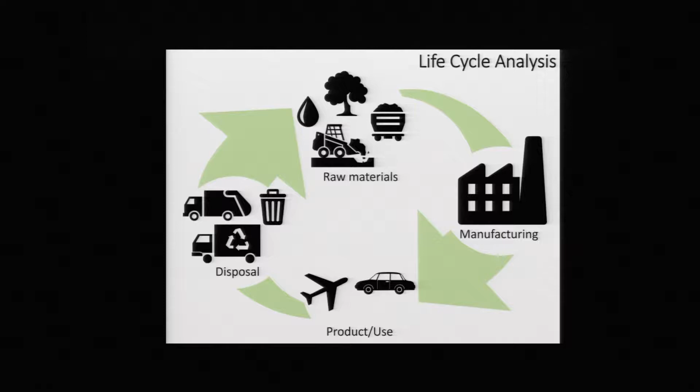To do this, we need to consider every step of the life cycle of a product we're designing. That's from where are we getting the materials, to how are we making it, how are we producing it, and eventually how will we dispose of it. In every single one of these steps, you need to think, how am I affecting the environment, and how can I ultimately reduce that environmental impact?

But I want to focus here today on one example that pertains mainly to manufacturing and the products that we're making. You'll notice the two examples I've used to represent the product come from the transportation industry. That's because the transportation industry and the manufacturing industry have one key thing in common: they're wasting 20% of the world's energy.

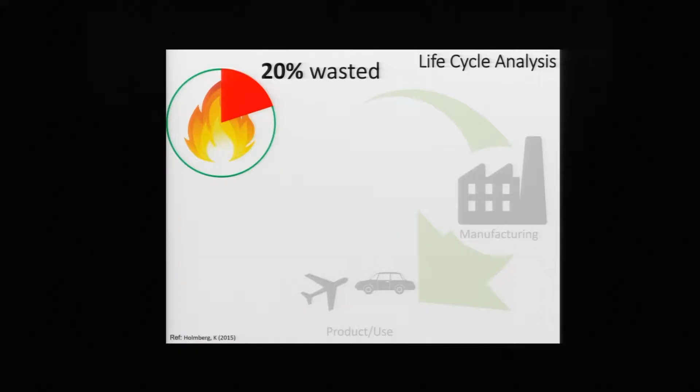Can you guess how? To overcoming friction. That's right, we are losing 20% of the world's energy to friction. This has huge environmental and economic consequences.

Think about the cost of the energy. Think about the energy we're producing is coming mainly from fossil fuels, and therefore how much toxic gases we're emitting without even using that energy properly. And finally, with more friction typically comes more wear, and more wear means more waste.

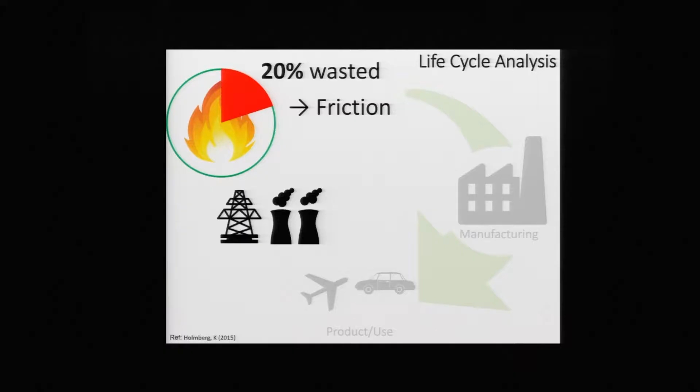So how do we overcome these issues? Well, it turns out there's an entire field of study focused on some issues that revolve around friction and other types of issues similar to this, and this field of study is surface engineering.

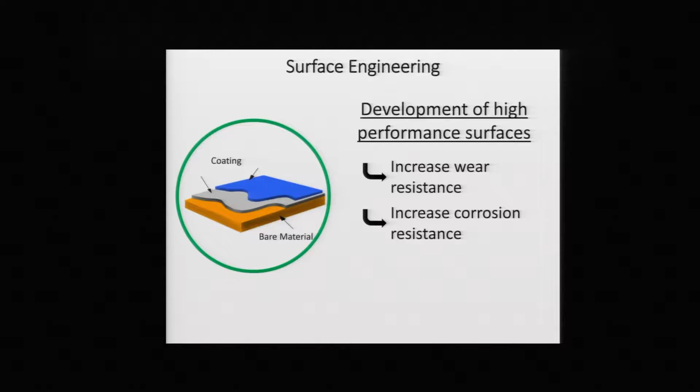Surface engineering focuses mainly on the development of high-performance surfaces, and this can be to overcome any type of environment. But the type of things that we tend to look at are how to increase wear resistance, increase corrosion resistance, and also reduce friction. But to do this, we need to look at both what materials we'll be using and what processes will we make these new coatings with.

So when we choose the materials, the first thing we need to think is, what materials do I have available to me? The three major classes that tend to come up are metals, ceramics, and polymers. Now, these materials, unfortunately, on their own, don't necessarily offer the type of properties that we need, and that's because each of them have their own advantages and disadvantages.

For example, a metal might be very ductile, but in consequence is not very hard. Or a ceramic is very hard, but then is not very ductile, and that's why it results in fracture typically. So it turns out that if you combine these materials to form a composite, you can actually take advantage of each material and tailor a new material that will give you the properties you need.

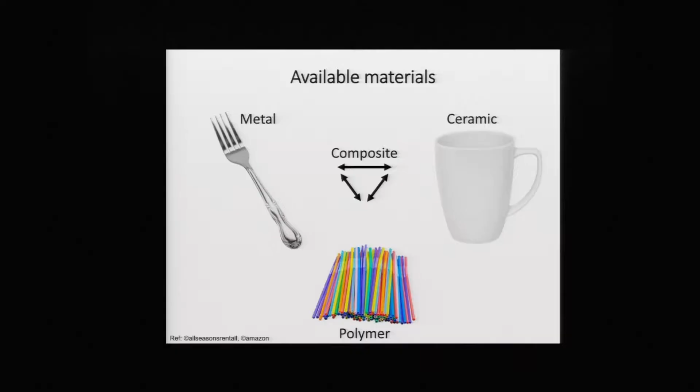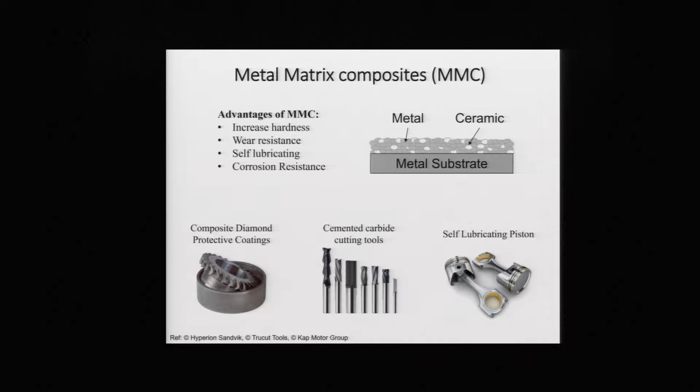In my work, I focus on metal-ceramic composites, and we often refer to these as metal matrix composites. These offer us increased hardness, increased wear resistance, increased corrosion resistance, and even self-lubricating properties. That goes back to that friction issue. If we could make self-lubricating properties, we can reduce friction and even try to reduce the need for toxic lubricants in various industries.

So how do we make these metal matrix composites? The technique I'm proposing here today is the cold spray process.

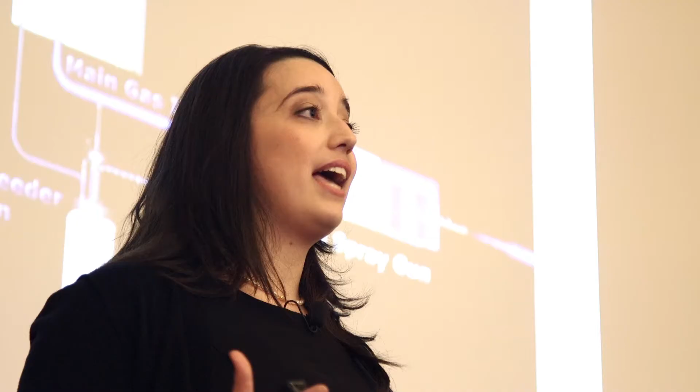The cold spray process is actually quite a simple technique and has only 3 major components. The first is the high-pressure gas. The second, the powder feeder. And the third is the cold spray gun, or we also refer to this as the cold spray nozzle.

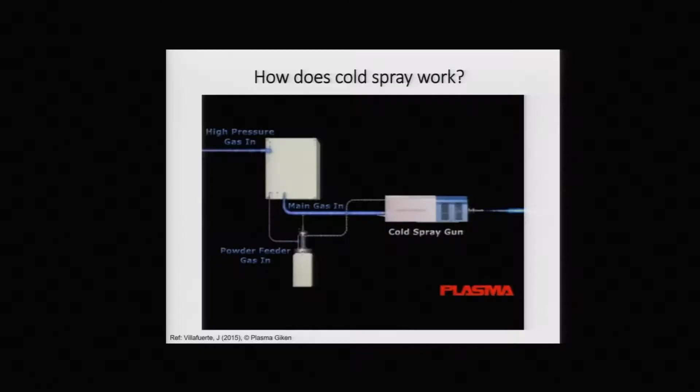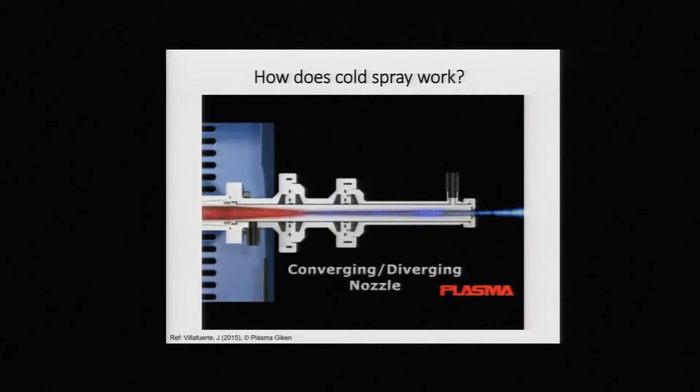The gas going directly to the powder feeder allows the powder to be injected into that gas stream. Once it reaches the nozzle, it recombines with the heated gas and can then go through the nozzle and achieve supersonic velocities. The particles coming out of this nozzle then impact the part and create a coating.

But why cold spray? Why not any other technique? Well, it turns out the cold spray process is quite environmentally friendly. The gas we're using is nitrogen, which is found in the air that surrounds us and is therefore non-toxic to us.

The powder that we're using is not melted. These are deposited in their solid state. And by not melting these metals, we are not getting any byproducts.

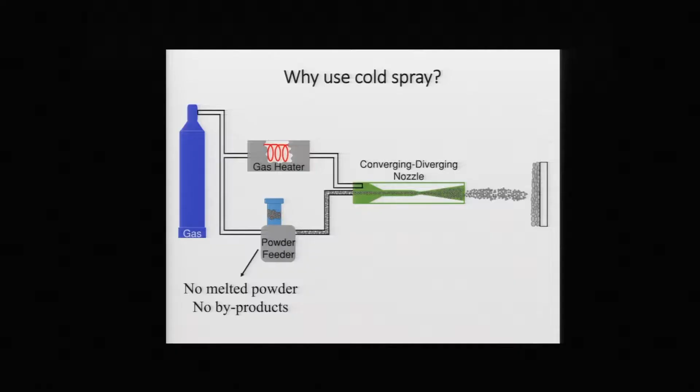Another interesting thing is that the heat input, the energy we're putting into the process, is actually not significant since we're not melting that powder. There's also various research being done to optimize the nozzles to try and increase velocity simply through the nozzle characteristics, rather than increasing velocity through an increase in temperature. So if we do this, we might eventually even remove the need for that heat input.

Another thing is that this is an additive process, so we are getting nearly 100% of the powder we're trying to deposit in the coating. But in order to do that, you need to understand how these coatings are being formed, the deposition mechanism, how they're bonding, and all kinds of characteristics like this. And that's where work like mine comes in.

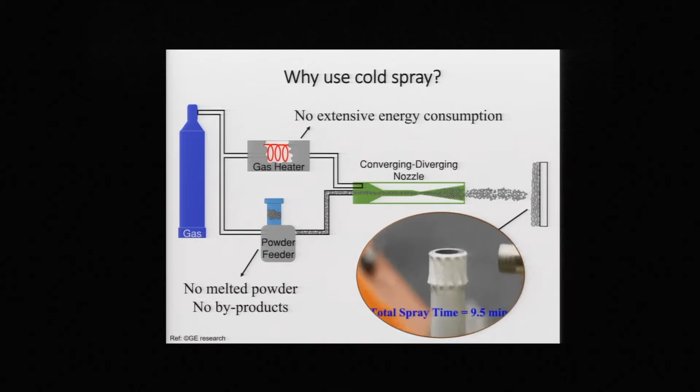Just a little side note, this coating technology is not limited to thin coatings. We can actually grow features onto a part because we can make thick coatings. And we can use this even for repairs.

But how do these particles get deposited? I mentioned, in order to get that 100% deposition, you need to understand the bonding mechanism. In metal-metal interfaces, the bonding mechanism is mainly through what we call plastic deformation, which is basically a permanent deformation of a material. It's really that impact that induces the plastic deformation and results in bonding.

And in metals, plasticity is really well understood. Take, for example, a fork. If you try and bend the fork, it'll maintain its shape, and it's the fact that it maintains that shape that is called plastic deformation. But if you think of a cup, can you do that? Especially in an impact scenario, what you would mainly expect to happen is this.

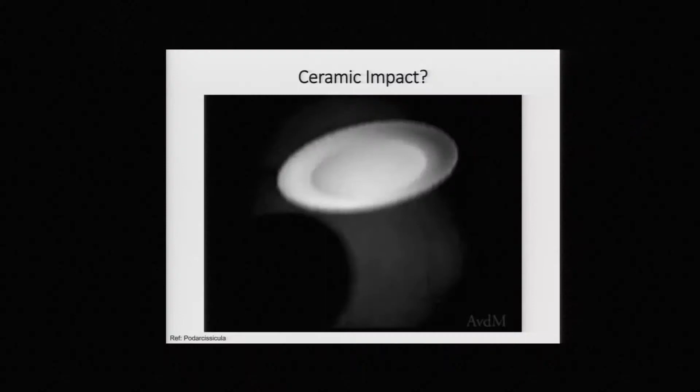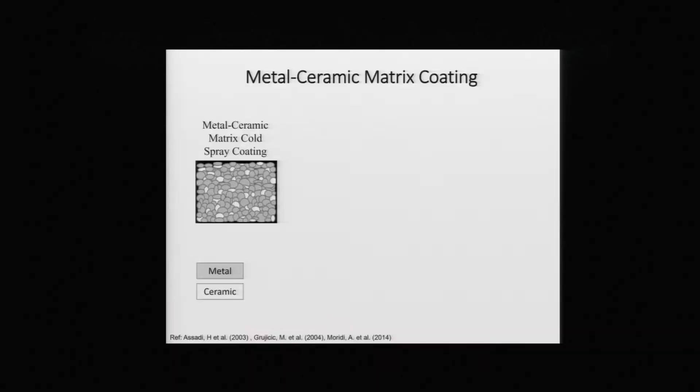But luckily, we can create metal matrix composites by cold spray. So let's see what's happening there. When we spray these coatings, we have both metal and ceramic powder being sprayed simultaneously. And when we spray these, we have 4 different types of interfaces. A metal impacting a metal, which bonds, as we explained, through that plastic deformation.

A ceramic impacting a ceramic, which unfortunately does lead to fracture. And finally, we have the metal-ceramic interfaces. These metal-ceramic interfaces are unfortunately not well understood, and that's what my research focuses on.

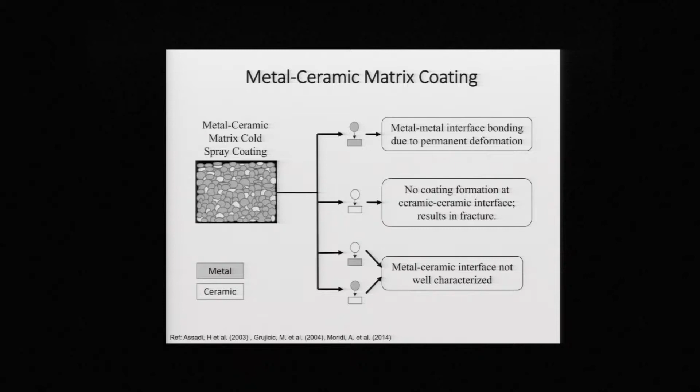When I'm trying to look at these metal-ceramic interfaces, there are 2 things that I'm focusing on at the moment. The first one is, what velocity do I need in order to achieve deposition? Just to give you an analogy here, these particles technically need to bond through plastic deformation. And as I mentioned, the ceramic won't plastically deform. So in that metal-ceramic interface, what do I need to get a bond, and why is it bonding?

You could think back to when you were a kid playing with Play-Doh, and you threw it at a wall. In some cases, it bounced back at you. But if you threw it hard enough, it could actually stick there. Well, that's exactly what we're trying to see here.

What is hard enough to get bonding? We study this by changing the ceramic and seeing how the type of ceramic that we're using will influence the critical velocity for deposition.

But once these particles have been deposited, we need to know how well are they bonding. How good is that adhesion strength? Once again, we study this by looking at how the type of ceramic will affect it, and also how surface roughness could affect it.

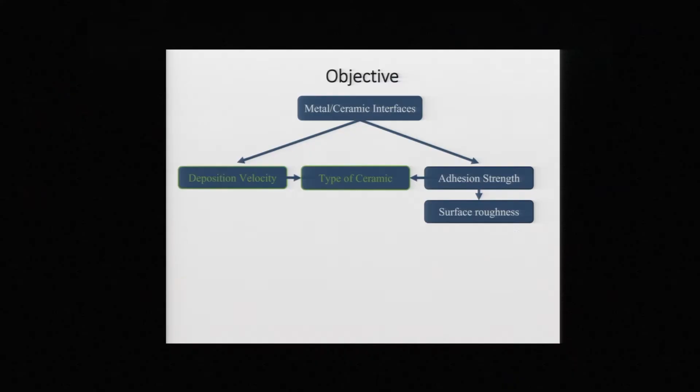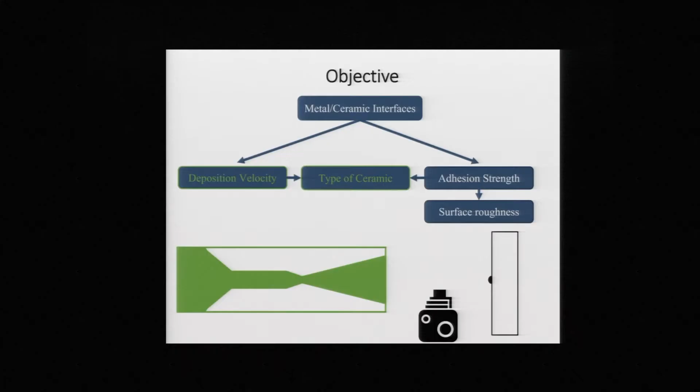So let's start with the deposition velocity and looking at how it's affected by the type of ceramics. To do this, I did experiments at MIT. These experiments were basically to spray those particles towards the two ceramics and capture the impact with a high-speed camera. The ceramics that we used for this were aluminum oxide and silicon carbide.

Once this metallic particle passed in front of the high-speed camera, you could see when it will bond and when it won't. In a case that it didn't bond, this is what the images would look like. Effectively, you can see that the particle is impacting at a relatively high velocity and then rebounds, and the rebound velocity is actually lower than the impact velocity.

If you take a ratio between the rebound velocity and the impact velocity, you get what we call a coefficient of restitution. This is basically a measure of how much energy is lost during that impact - a quantification of the amount of energy you're losing due to plastic deformation.

If you were to take this particular experiment and plot it on a graph with respect to the impact velocity, you would get this. And if you repeat this multiple times, you would get a series of points that show you how that coefficient of restitution varies with impact velocity.

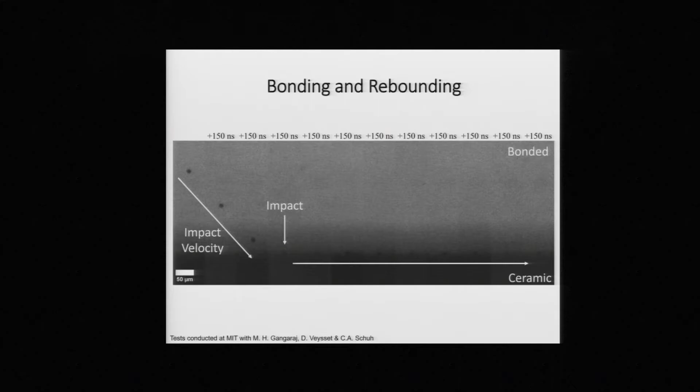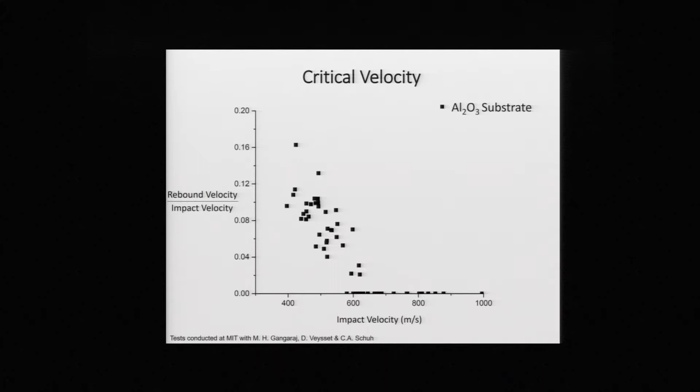And eventually, you'll get adhesion. This is an image that we observe when the particle does not rebound. On this coefficient of restitution graph, these will appear as points on the x-axis. And you could see that at around 600 meters per second, you'll get adhesion.

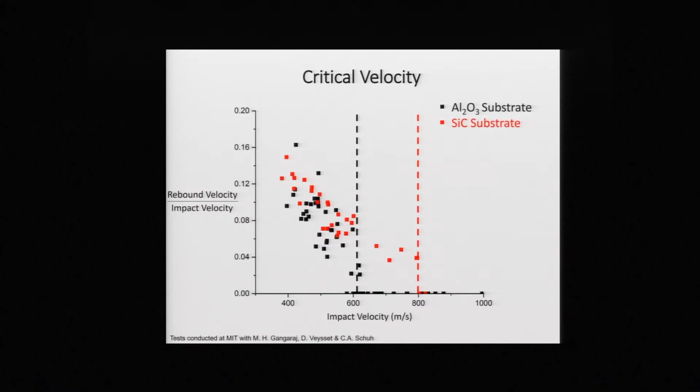But these are the results for titanium deposited on aluminum oxide. What happens when we deposit on silicon carbide? In fact, what we observed was that the critical velocity is closer to 800 meters per second. So changing the ceramic has a significant influence on the velocity you need to be spraying these at.

So now let's look closer at the particles that bonded and how strong is the adhesion strength, and how the type of ceramic will influence it, and how surface roughness will influence it. To do this, we sprayed single particles towards aluminum oxide with different surface roughnesses and then repeated the experiment with titanium deposited on silicon carbide.

At this point, you might be asking yourself, well, if you're depositing these single particles, how can you test their adhesion strength? We have specialized equipment to do this, and this equipment effectively comes and removes the splat - which is what we refer to as the particle bonded to that part - and can measure that adhesion strength.

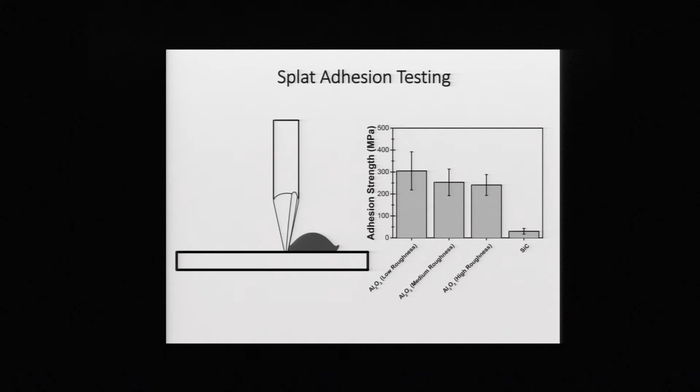The results we've seen were actually quite interesting. The adhesion was higher to the low surface roughness aluminum oxide than to the high surface roughness aluminum oxide. This is kind of counterintuitive, because if the bond was only mechanical, you would expect that with more surface roughness, it would kind of be clamped in there. But that's not what we're seeing - it's not giving a higher bond strength.

Another analogy would be if you're trying to remove gum off a glass or off of a carpet, usually a higher surface roughness gives a higher bond strength. We're not seeing that here. Also, changing the substrate to silicon carbide allowed us to compare how aluminum oxide behaves versus silicon carbide, and what we saw was that silicon carbide bonds with a much lower bond strength than the aluminum oxide at any of its surface roughnesses.

Why do we get this low bond strength? To understand this, we need to go to the scanning electron microscope and analyze the cross sections of these interfaces. What we can see is the morphology at the interface, and we can understand if there are any chemical changes or if the composition changes at that interface.

But we're actually going to need to go even further than that and see at the atomic scale if there's any chemical interaction to explain why surface roughness has a counterintuitive effect and how the different ceramics play a role here. We saw that changing the ceramic had an effect on both adhesion strength and on the velocity you need to deposit these.

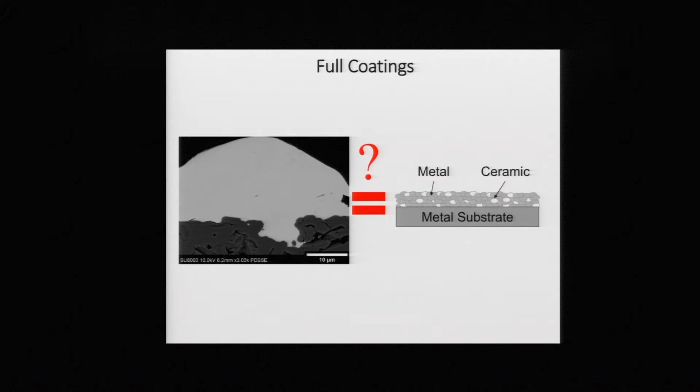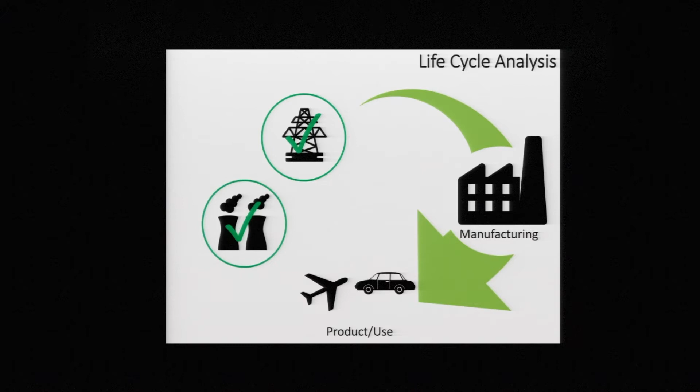But once we've completed all of this work, we're going to need to think back and see how these single particles reflect in a full metal matrix composite coating. This work will help us improve those metal matrix composites, and by improving them, we can go back to the manufacturing and transportation industry and see advantages in reducing friction. We're going to reduce our energy consumption, reduce the amounts of toxic emissions, and also reduce waste.

But just before ending, I'd like to say one more note about the manufacturing industry. Today I presented a technique that is not only created for these metal matrix composites. It's actually an environmentally friendly technique with other applications, and the study of these metal ceramic interfaces can allow us to use this technology to potentially deposit metal coatings on ceramics.

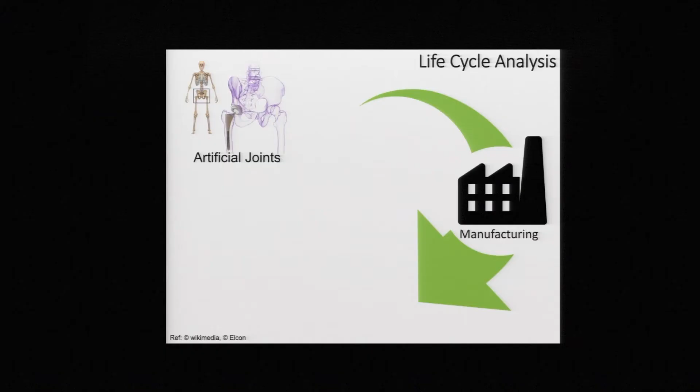This could have huge implications in biomedical industries because, for instance, titanium and aluminum oxide, which are showing the higher bond strengths, are both biocompatible materials. This can help us improve artificial joints. We can even think of the electronics industry, where we can generate customizable circuitry or metal ceramic seals. And I'm sure there are millions of other applications I haven't even thought of.

It is the development of these environmentally friendly manufacturing techniques, thinking about the materials we're trying to produce with them, that are bringing us one step closer to achieving harmony between the environment and industry.